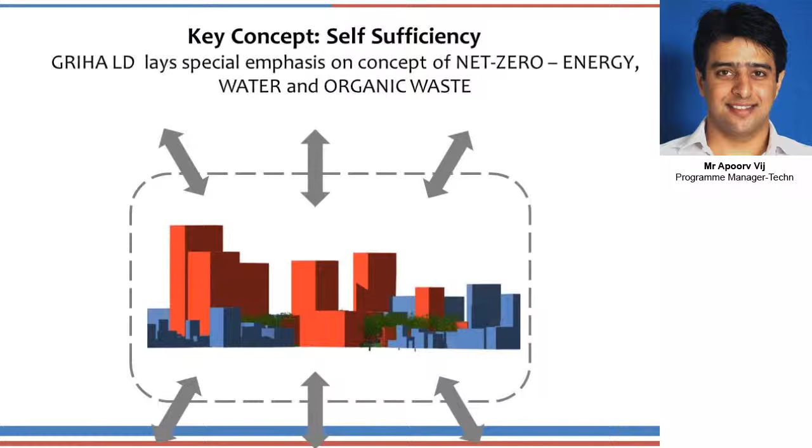Focusing on broader aspects instead of establishing multiple criteria, the entire rating has been split into 7 sections. Each section has some appraisals, but broadly it's the sections which dictate the overall points. So again, the focus is on key numbers at the development level, not minute detail of everything, because at that scale, broad numbers work.

The 7 sections of GRIHA LD are carrying capacity, site planning, water, solid waste management, transport—important at the LD level—social, and energy. Social is something GRIHA is slowly focusing on, adding social parameters to each rating system so we constantly shift from being purely a green building rating to a sustainable building rating system. In addition to environmental parameters, a conscious decision is to keep adding socioeconomic parameters and keep pushing ourselves towards a sustainability-based rating system.

In each of these sections, impact is calculated on 2 key themes: self-sufficiency and development quality. Self-sufficiency focuses on resources, so only 3 sections have this component: energy, water, and solid waste. Everything else has development quality as the only parameter. The subsections are: energy self-sufficiency, water self-sufficiency, organic solid waste treatment, site planning, energy, water, solid waste management, transport, and social.

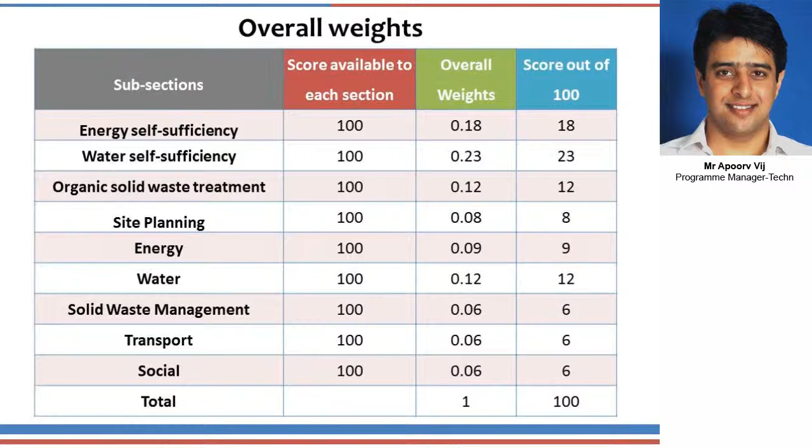The rating of the project is done in 2 parts. One is the master plan rating—once the project is conceived right in the beginning, a one-time rating to see the proposed self-sufficiency of the entire development once complete. But each phase gets its own rating based on actual construction. So the master plan rating can be taken right at the start, but if the project is split over 3 phases and the 3rd phase starts 10 years from now, requirements, priorities, bylaws, and population density will change. Therefore each subsequent phase's rating is independent and evaluated at that point in time based on the parameters relevant then.

So let's begin with the sections. The first section is carrying capacity and carbon footprint. This is purely an indicative section, meaning there are no points here, but we wanted to introduce it because we want projects to start doing this analysis for themselves, to begin understanding what kind of pressures are being exerted by the development.

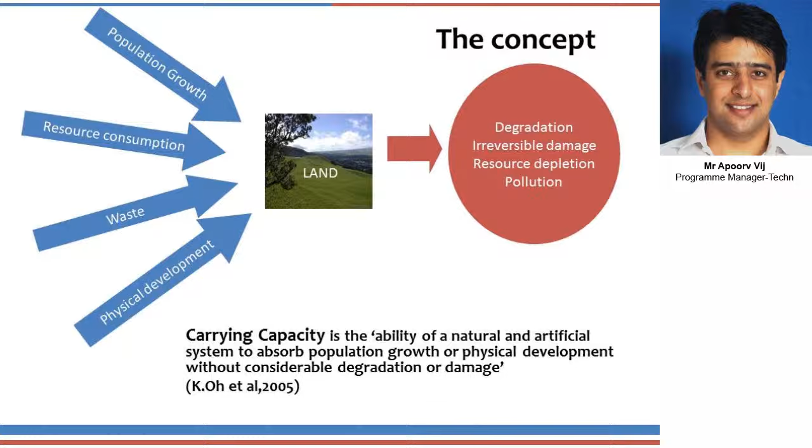To do this in a simpler manner, since we've just begun introducing this in the ratings, we have focused on three parameters for carrying capacity right now. The first is carrying capacity of available water. Here, as you can see on the screen, for the project level, what we ask you to do is look at the total water available to you, divided by the per capita requirement per day.

This gives you the total population that can be supported on the site by the amount of water actually available. If the population that can be supported is greater than the population you're planning, that means the people on site, once the project is complete, will always have enough water and there won't be a shortage, unless the supplies stop. Suppose on a piece of land only 15,000 people can be supported, and you are planning a project to house 18,000 -- that means there's a shortfall for 3,000 people's daily water requirement. The intent here is to provide those indications to the project team.

This section does not affect the rating, but the intent is to keep indicating the kind of development that is being done. The next component is carrying capacity of green cover.

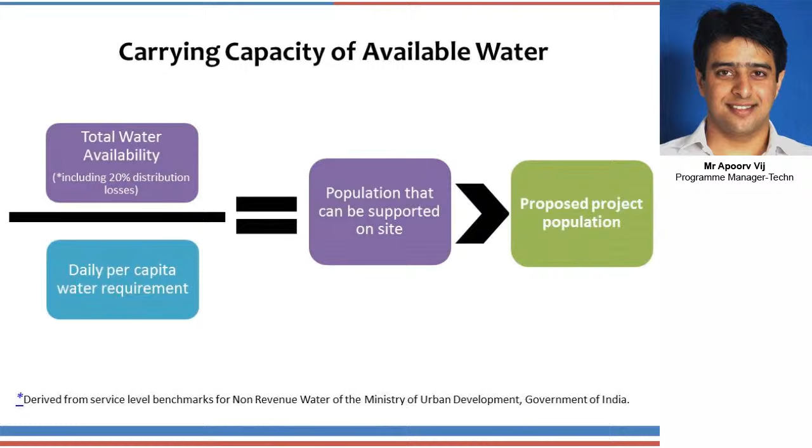This is based on a WHO standard. WHO says in any large-scale development or city, every person must have at least 9 square meters of green cover available to them -- that's the minimum amount of green cover required. So here, one looks at the total green cover divided by the project's fixed population only. If that is greater than 9 square meters, then you are doing a good design, meaning every person will have a certain amount of green cover over and above the WHO recommended minimum standard.

The green cover here only counts canopies of trees and urban forests. Playgrounds, jogging tracks, paved parking, and grasses are not counted here -- only tree cover and urban forests.

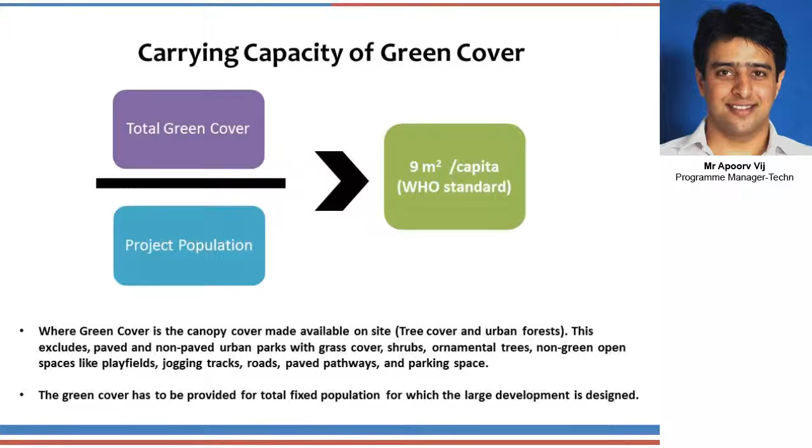The last part of carrying capacity is carbon footprint calculation. Here we ask you to calculate the per capita carbon emissions -- again indicative, but an exercise we want people to begin doing for their projects. It's fairly straightforward: we take the total CO2 emissions from the buildings, then the total CO2 emissions from transport, and the summation gives us the total CO2 emissions.

How do we get CO2 emissions from the buildings? You look at the total energy consumed by the buildings and site infrastructure -- there's a section that covers all energy from where you can get this number. You multiply it by 0.81, which is the emission factor we're considering, based on the Central Electricity Authority report. That gives you the net annual emissions from the buildings.

After this, we look at CO2 emissions from transport. There's a dedicated transport calculator built into the online documentation tool of GRIHA LD. You simply input the minimum distances people have to travel within the site, and depending on that typology, it calculates annual CO2 emissions from transport. Both these numbers are extracted from the tool, giving the total CO2 emissions from the development. When we divide this by the total project population, we get the annual per capita CO2 emissions. India's national average is 1.3 tons CO2 per annum per capita.

So if the emissions are below this, that means the project is actually designing for a lower footprint than India's national average.

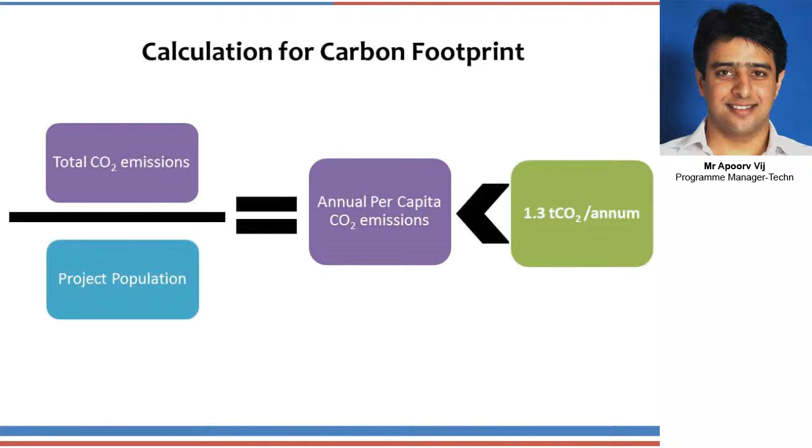So in case a project constructs very pedestrian-friendly, walkable distance-oriented developments, and if they construct efficient buildings with a lot of clean energy sources, then that, of course, gets benefited.

Moving on to the 6 sections, beginning with site planning and coming to development quality. So the stormwater management is the first criteria, which is partly mandatory.

This has about 30 points. In this section, we're looking at 3 different things. First, ensure that the total stormwater management plan is designed such that post the development of the project, the peak runoff rate and quantity do not exceed the runoff rate and quantity from the last 2-year 24-hour design. This is mandatory. The idea is to ensure that because of the development, urban flooding should not start happening.

The peak runoff rate and quantity before construction should be met even after construction. Now this, for a 2-year 24-hour design, is mandatory. However, if the projects do this for a 5-year 24-hour peak design, that means a broader average, then the projects are given 15 points because that's a better design, a better initiative. So basic design of a 2-year 24-hour design is mandatory, but a 5-year 24-hour design gets points.

In addition, incorporation of sustainable urban drainage systems, or SUDS, into the stormwater management strategies, to ensure that litter, solids, hydrocarbons, etc. are removed from stormwater, fetches extra points. Essentially, the projects will have to design SUDS for the entire stormwater drainage so that the SUDS can take care of and filter the particles out of the stormwater.

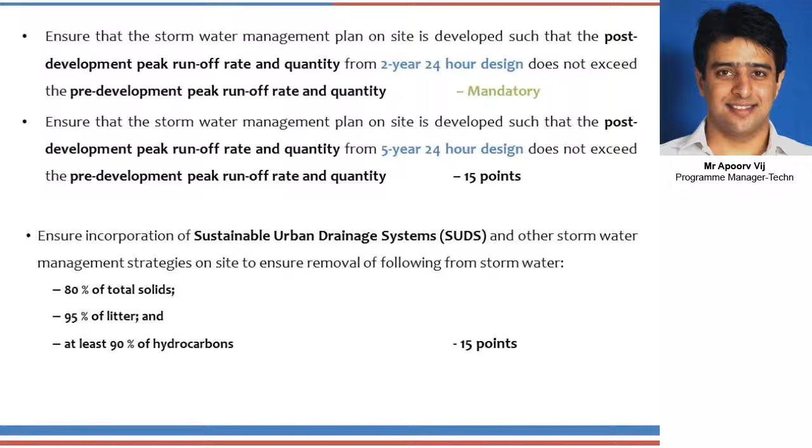The intent of SUDS is that they are a sequence of management practices, control structures, and strategies designed to efficiently and sustainably drain surface water while minimizing pollution and managing the impact on water quality of local water bodies. So these are natural mechanisms to manage stormwater.

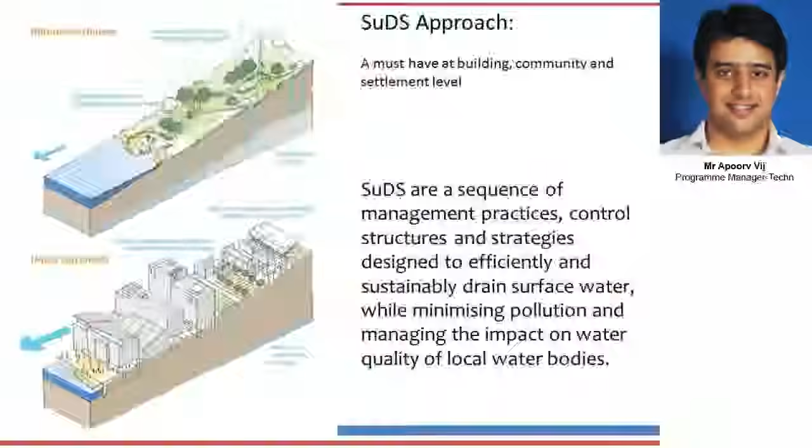The next parameter is maintaining existing site features. Projects are awarded about 30 points for this. The intent here is to ensure that more than 25, 50, or 75% of the total site area under existing natural features on site, like water bodies, dense mixed species tree clusters, and very steep slopes with contours greater than 1:4, are preserved during construction and post-construction.

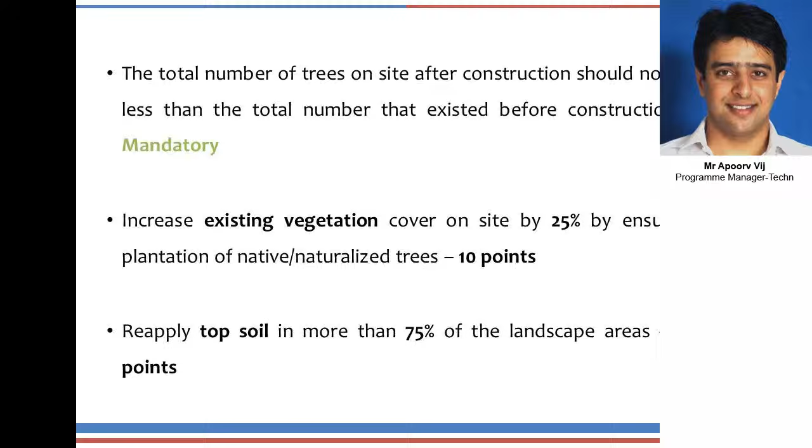Coming to the next section, that's energy, and let's begin with self-sufficiency. Design the development to ensure at least 25% self-sufficiency. This is mandatory. That means a certain amount of self-sufficiency has to be built in. This can be done through energy efficiency and on-site renewable energy sources.

Again, as I said, GRIHA LD is focusing on flexibility, so we do not mandate how much can be achieved through energy efficiency and how much through renewable energy sources. We just say achieve the 25% self-sufficiency, and the project teams can choose what is the balance between energy efficiency and on-site renewable that they would like to implement. Of course, the eventual aim is to see if the project can be designed to be fully self-sufficient, in which case that will be net zero.

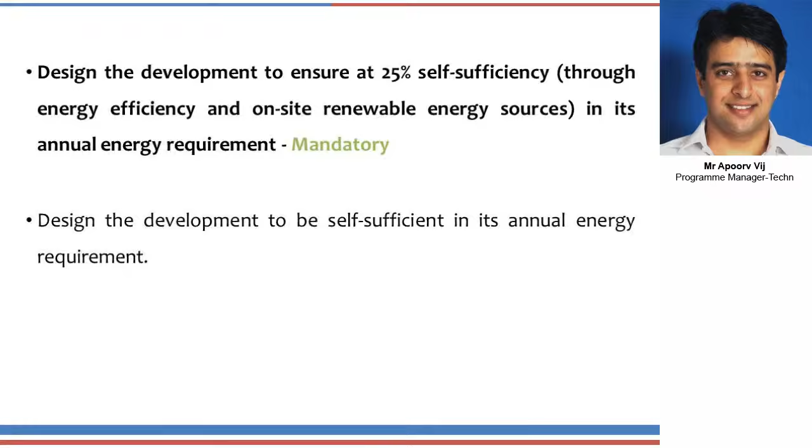Now, the methodology to do this has two parts. One, demand reduction. First, design energy efficient buildings, energy efficient street lights, etc., so that you need to consume less energy as compared to the GRIHA base case. So the GRIHA base case EPI and the GRIHA base case for street lighting, which are there in the LD manual, are used here as base cases, and you have to design the buildings to ensure that your buildings are far more efficient than these, and that will start bringing in the self-sufficiency for you.

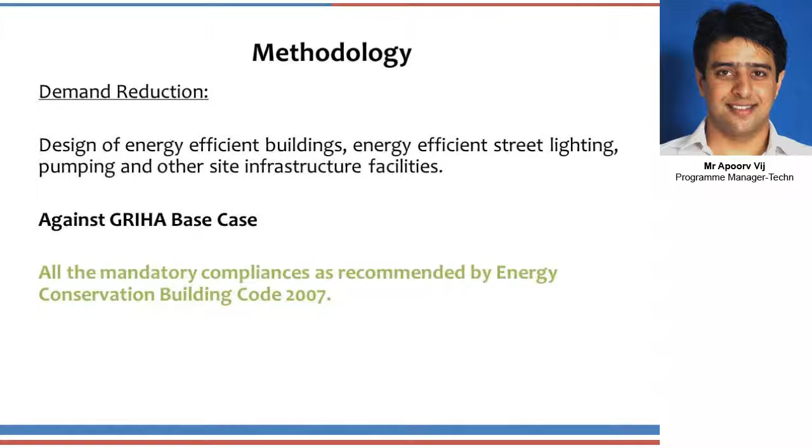Looking at the calculation, this is how actually the entire calculation is done for self-sufficiency. On the top, you have the design case. B1 is building EPI. EQ is equipment load. As you know, in GRIHA, the EPI does not include equipment load, but in LD, we take into consideration every unit that gets consumed on site. So we say building energy consumption, L1, L2 are street light energy consumption, and P are pumping and utility energy consumption. RE is the on-site renewable that gets generated.

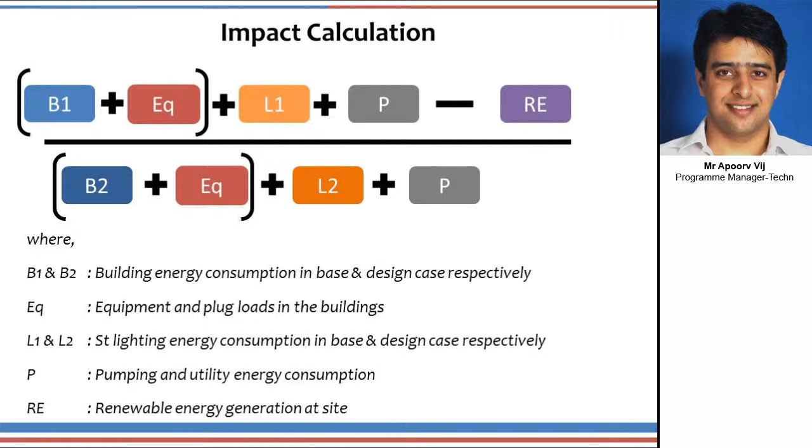So if you notice, B1 and B2 are different. B2 is the base case EPI. If your buildings are far more efficient than GRIHA, then B1 will be quite less. That begins your reduction. L2 is base case street lighting consumption. If your street lights are more efficient than the GRIHA LD base case, as you can see in L1, it will be different, and therefore reduction will happen. And the remaining will happen through RE. Their equipment load and pumping and utilities do not have a base case in GRIHA LD, and therefore whatever you select in base case will go into design case. They will stay same in both of them.

Coming to development quality, moving to outdoor street and security lighting. This is a mandatory clause. Outdoor street lights should meet the required lux levels. This is crucial from the perspective of visual comfort of occupants of the project in the night when they move about. This is also useful and important from security perspective, that all the outdoor areas, wherever required, have sufficient amount of light and are not dark. Also, additionally, automatic switching or dimming controls should be provided for all outdoor lights.

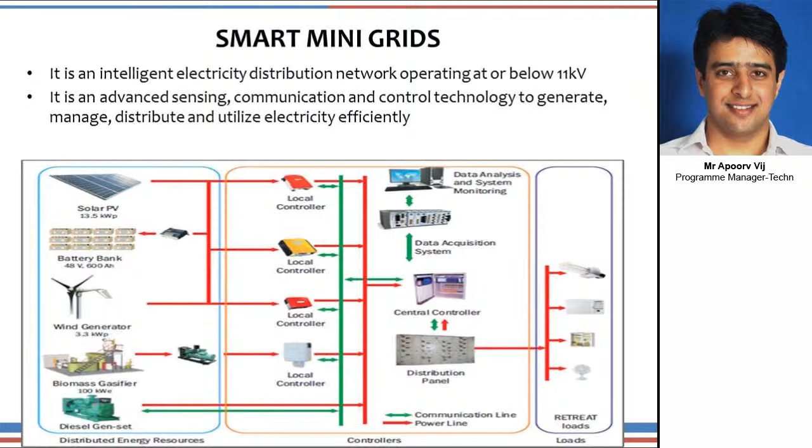The wastages are less. So for example, if a project has renewables on site and it has a direct connection from the utility grid, then the controller can see how much energy is being obtained from the renewables. It will use that completely, then see how much more energy is required by the project and take that from the utility grid. So it can do real-time monitoring and this management automatically, which is an extremely important move now. So therefore, we have certain amount of points dedicated to smart mini grids. First, integration of various energy sources with prioritization to renewable energy sources should be done, which means the smart mini grid must on site first consume renewable energy and the balance should come from the utility grid.

Real-time monitoring and control, even on mobile devices. So wherever you are, you can go online through your tablet, laptop, mobile phone, and look at what the consumption numbers are like, what generation is like. And a bit of demand side management is important. So in case the controller thinks there's a slight fluctuation, it should be able to turn off water pumping, street lighting, etc., which is why we've written based on predefined criteria. So if there's a fluctuation, do X. In case there's an energy shortage, do Y, etc. Those should be built in.

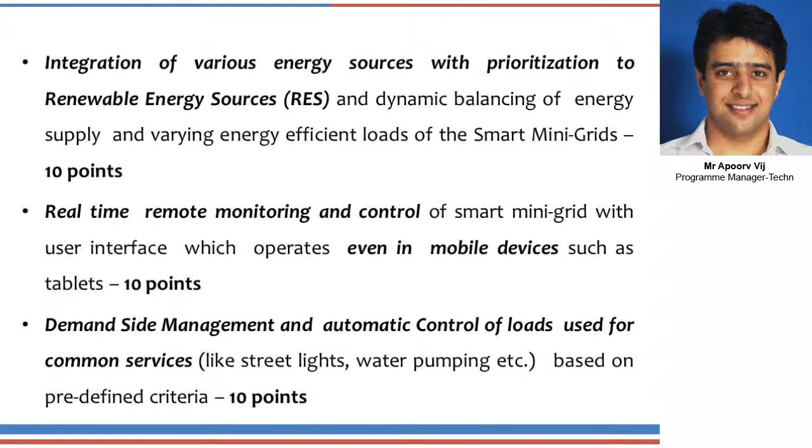Passive urban design. Here one is focusing on adopting strategies so that the outdoor temperatures in pedestrian areas do not increase too much. And if you do a good passive design, then it should be reduced below the GRIHA LD base case. To simplify that again, because of construction, there's a certain amount of increase in outdoor temperature that happens. The intent here is to see how much that outdoor temperature increase can be reduced below the base case, and points are awarded accordingly. This is again a point-based analysis, and therefore we ask you to do this analysis over 5 outdoor common areas. Common areas would mean areas where people gather mostly, because we're looking at occupant comfort.

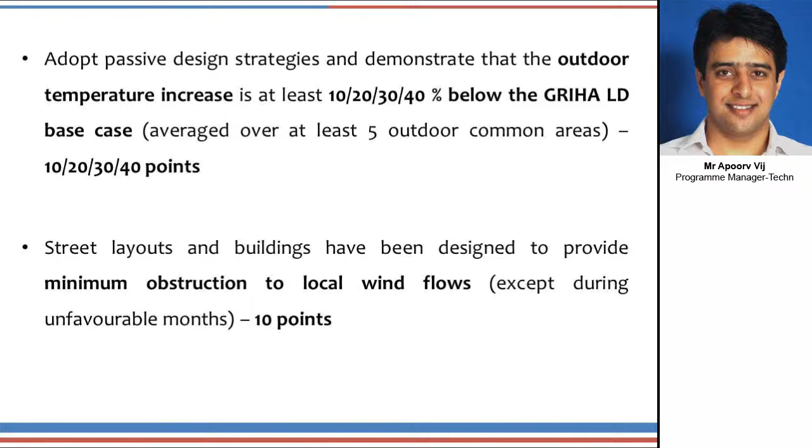And street layouts and buildings should be designed to provide minimum obstruction to local wind flows, except during unfavorable months. So in case you're in Delhi or, say, Chennai, and you don't want a lot of wind flowing through peak summer months, but otherwise you would like the wind to keep flowing, minimum obstruction on that.

Coming to outdoor temperature, an example is this site where you have a lot of soft paving, you have trees, you have water bodies, all of which help mitigate the outdoor temperature. And the calculator that we have is designed to do this analysis. This calculator analyzes the effects of built environment over an area of 50-meter radius. And therefore, one suggests the project team to select at least 5 representative areas and do the analysis over there.

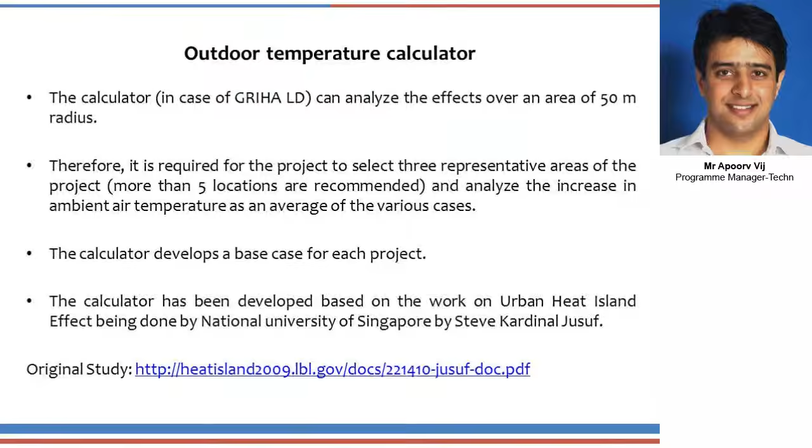The calculator develops its own base case to analyze how good you are. This calculator is based on the work being done by National University of Singapore on urban heat island effect. And the output of the calculator is something like this. So if you notice the blue column, it will tell you, based on your design, this would have been the increase in temperature in the base case. The green column tells you this is the increase for what you are proposing. And the purple column tells you this is the reduction between the two. So higher the reduction, that means better your design against the base case and better the points you get.

So the more you design for outdoor temperature comfort, to be comfortable for occupants outside, the better the points that you get. This can be done largely through a lot of vegetation, because green cover does have a huge impact on outdoor temperature mitigation, and the massing and the percentage of hard paving that you have outside. Based on the sensitivities that we did, these are the key things that affect it a lot.

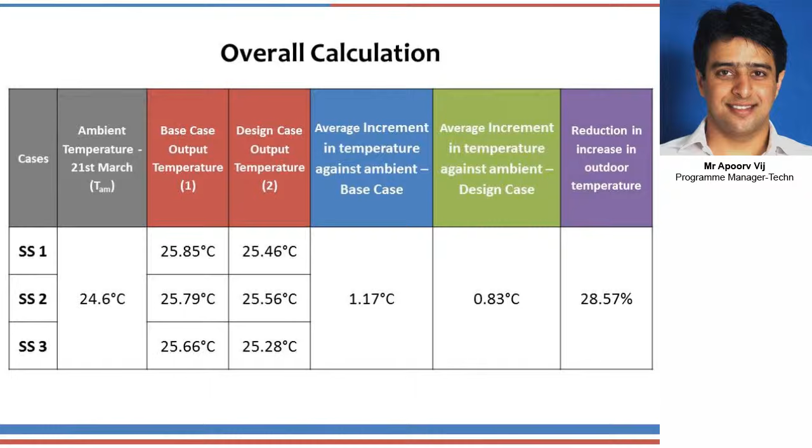Last component of energy is metering, operation, and maintenance. This is partly mandatory. So energy metering is mandatory. So basic meters at multiple sources to see how much energy is being consumed from the local grid, DG set, on-site renewable energy sources, that's mandatory. Sub-meters on each building, outdoor lighting system, and the campus pumping station, again, mandatory. There should be a constant log to see this is the amount of energy being consumed through each of these point sources.

After that, if a project has a dedicated operational staff for O&M of all electromechanical systems, you get 10 points. If an operation and maintenance protocol is actually established and implemented, that's 10 points. It's extremely crucial to educate the operational staff with the protocol. And periodic energy auditing fetches another 10 points. That means every year, at least a basic audit, very, very basic, and tabulation of numbers should be done by the project teams.

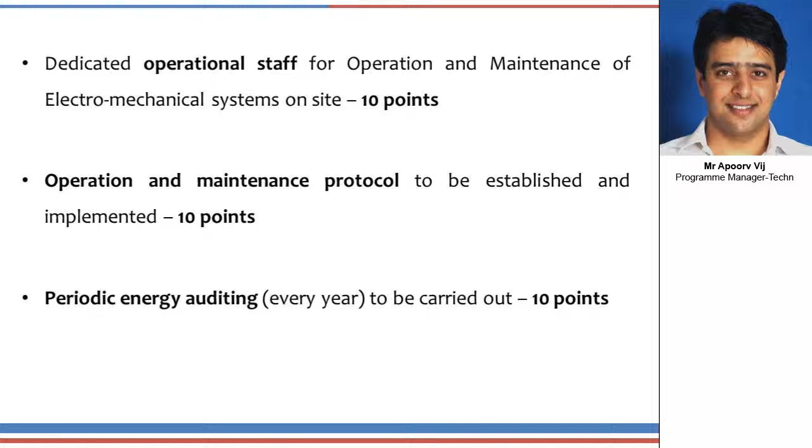Then we come to water and wastewater, self-sufficiency, and there we say design the development to be at least 25% self-sufficient in the total amount of water required. This means self-sufficient against groundwater or municipal supply. See how you can capture water on your site, recycle and reuse it so that you are self-sufficient on site itself. 25% self-sufficiency is mandatory, but it is recommended to be fully self-sufficient as well. And interestingly, in GRIHA for large developments, out of the 10 projects that we have, about 3 projects right now are actually designed for 100% self-sufficiency of water, which is a very encouraging practice.

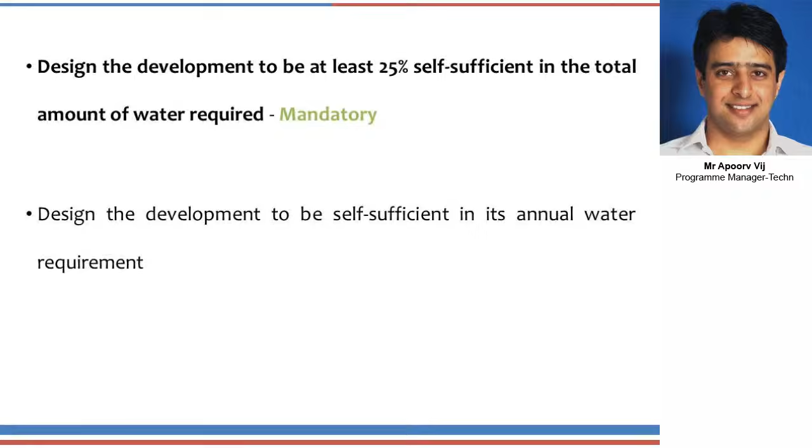So the self-sufficiency calculation looks like this. You have total water demand, which is the building water demand, domestic water demand, your landscape water demand, and all the water you need for utilities. This is the total demand that you have on site. You subtract what you are recycling and reusing, so recycled wastewater, and the captured rainwater that you are filtering and reusing. Whatever is balanced is the amount of water that you need from the municipal grid or groundwater.

If this balance is 0, that means you're fully self-sufficient. If you are not reusing water at all, you're not capturing rainwater, and that water reuse section is 0, that means you're fully dependent upon outside. So here the mandate is to have at least 25% self-sufficiency, but 100% is recommended.

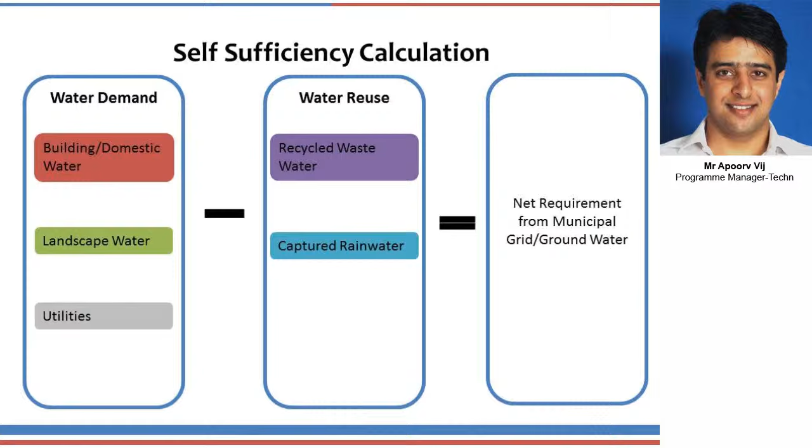In development quality, the first becomes quality of water. This is mandatory, which means whatever water is being used at whatever source or whatever point in the project should meet the minimum quality requirements as per the IS codes.

Water metering, so metering of main water supply, treated water, recycled water, rainwater should be metered. That's mandatory. Sub-metering of each building and sub-metering of the irrigation system is mandatory. The idea is that metering is a very crucial aspect, and it is important to conduct this in projects. That's why we made basic metering mandatory, and advanced meterings get points.

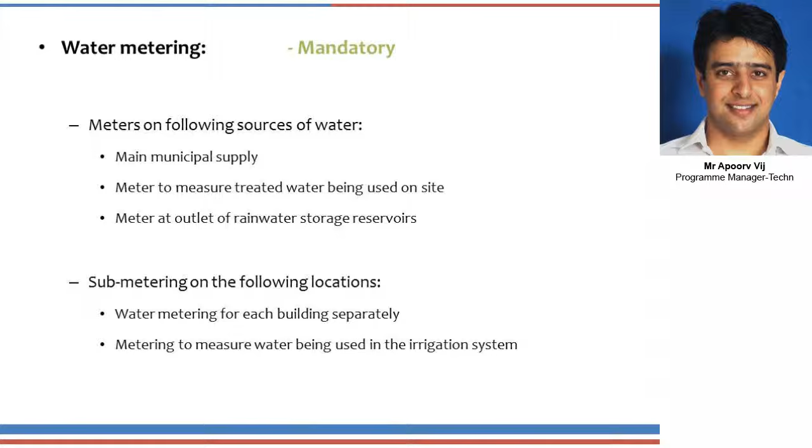An STP or wastewater treatment on site should meet the CPCB norms. So the project gets 20 points if the STP meets the CPCB norms. If the project recharges surplus rainwater through appropriate filtration measures, it gets another 20 points. That means you have surplus rainwater and you're recharging that after filtration. That's a good practice. However, if the Central Groundwater Board says do not recharge for your particular location, then this particular parameter is not applicable to you.

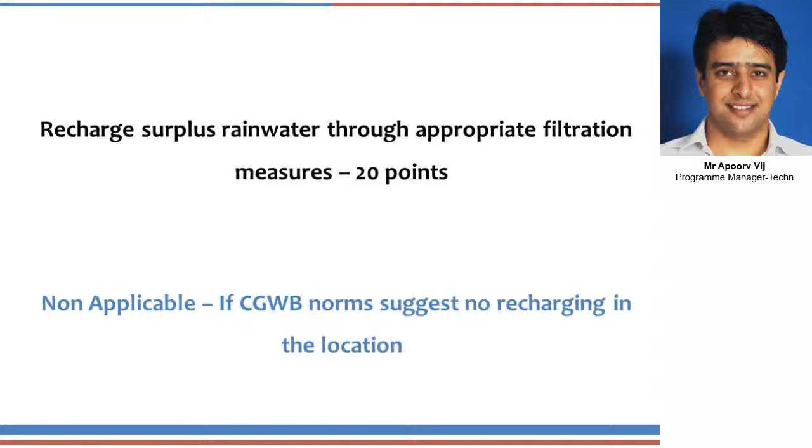All fixtures on site should be low flow fixtures. So as a blanket component, everything should be low flow. WC, urinals, showers, kitchen faucets. So it can straight away be looked at in a tender document, in a BOQ, that everything purchased is low flow.

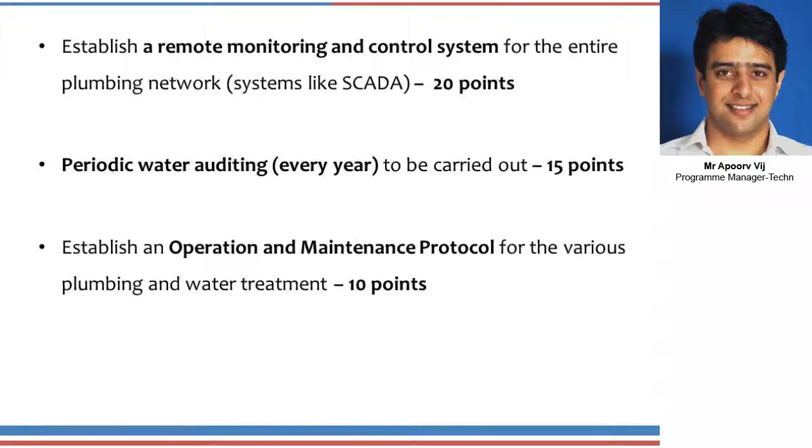And the last one, remote monitoring, operation, and maintenance. So establish a remote monitoring and control system for the plumbing network. That's 20 points. Do periodic water auditing as well. That's 15 points. And establish an O&M protocol. That's another 10 points.

Coming to development quality, the first part that's mandatory is handling and treatment of special waste. By special waste, we refer to medical waste. So if there is a medical facility in the project, then on-site incinerators, autoclaves, etc. for treatment of that waste as per the bylaws, as per the guidelines must be there. Or if the guidelines say send it to a nearby treatment facility, then that provision should be there. That plan should be in place.

And the second special waste is e-waste. So projects are required to have contractual tie-ups that eventually e-waste from site will be taken and recycled by certified e-waste recyclers. Both of these are crucial, important special waste, and their treatment is an extremely important aspect.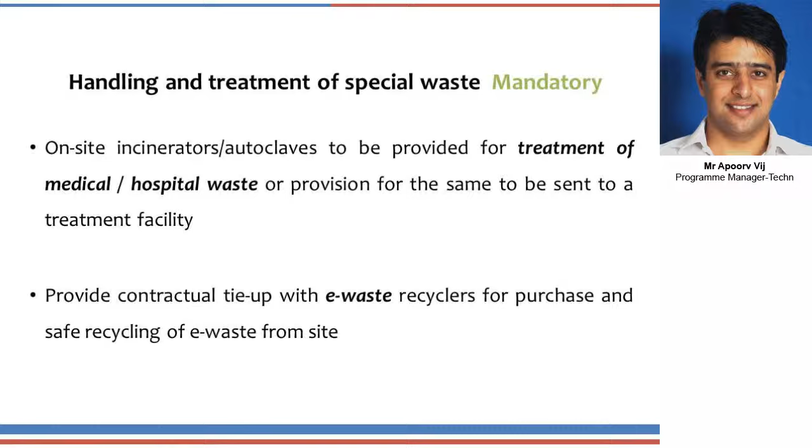Use of sustainable construction materials. This is something new that has been introduced in version 4. In your construction of roads, ensure that at least 5 or 10% of recycled waste is used. Most of the road construction, you can use recycled plastic, etc., or sometimes waste concrete from the site itself, so that's recommended.

Reuse waste in construction of paving on site. So this could be broken bricks, blocks, etc. from the project itself, which can simply be reused on the pavements as well. And all cement in the project should be PPC, or if you're doing an on-site mix, then at least a 15% mix.

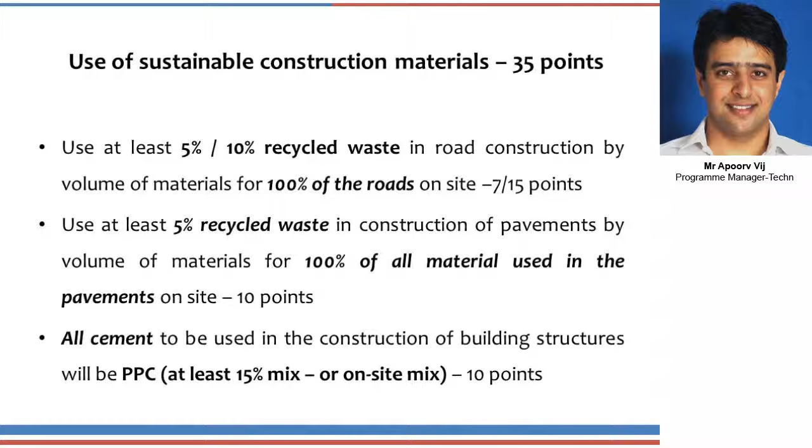Segregation of storage of waste on site. This is during operation. Provide hygienic secondary storage facility for organic and recyclable inorganic waste. That means people segregate waste when they throw it in different colored dustbins. At the project level, you should have a dedicated space where different wastes are stored separately.

And once the wastes are stored separately, there should be contractual tie-ups with different recyclers who can purchase this waste from you and recycle it. Organic waste, of course, you would treat on site, but plastic, metal, paper, etc. can be sent to outside recyclers who can purchase it from you. But that kind of a tie-up should exist.

Construction and demolition waste management. Develop and implement a construction waste management plan. So that means during construction, site engineers know how to manage different waste, where to store it on site, how soon to clean it from the different building points and bring it to a consolidated space on the site, and adopt strategies to recycle and reuse this on site or off site.

So if you're doing it off site, then a contractual tie-up with a recycler who is coming and taking it for recycling. If you're reusing this on site, then photographs, etc., of how that is being done on site.

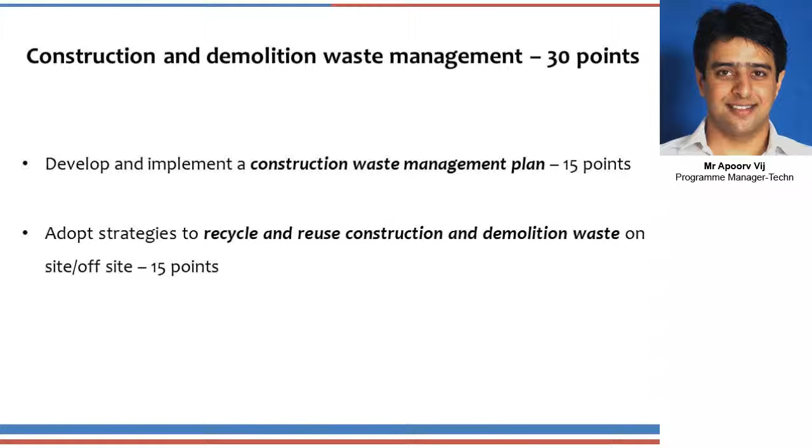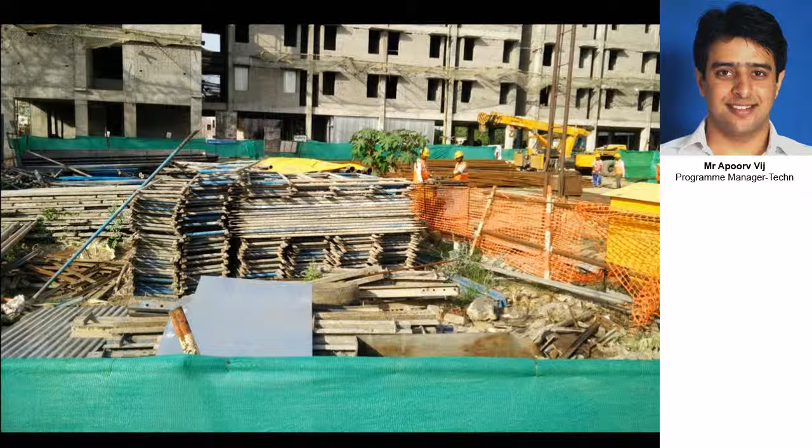This is one example of construction material storage and waste management. Coming to transport, development quality, provision of footpaths and bicycling tracks, and safe interaction of non-motorized traffic with motorized traffic. This is partly mandatory. So firstly, all roads should have footpaths, sidewalks, and cycle tracks, mandatory. All footpaths, cycle tracks should be continuous, wide, and universally accessible.

It shouldn't happen that somebody is using a footpath and walks on a road and it comes to a junction and suddenly realizes that after the junction there is no footpath. That means it should be continuous, it should be wide, and it should be universally accessible. These are important parameters for the success of these infrastructure facilities. Then, importantly, both of these first ones are mandatory. What are optional are the following.

Supporting infrastructure and facilities like bicycle parking, landscaping, public convenience, etc. should be provided. That's 15 points. Having trees, places to sit, etc. are helpful in enabling people to use these kind of infrastructure facilities to walk, to cycle more. And there should be necessary physical safety measures like railing, etc., non-slippery surfaces, so that in case somebody thinks they are slipping, they should be able to hold on to something. This is not necessary throughout the footpath or cycling track, but at crucial junctions where one thinks that some sort of slippage is possible.

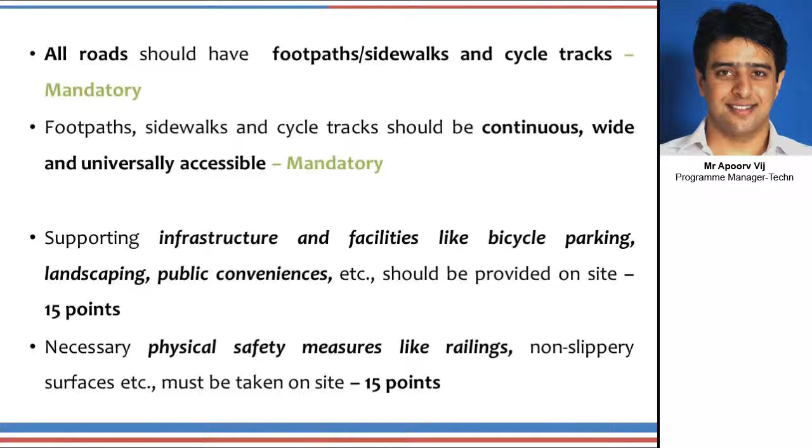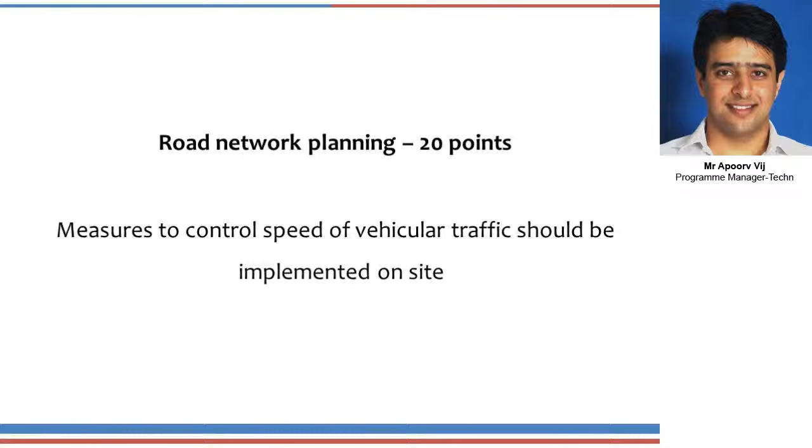Road network planning. Take measures to ensure that the speed of vehicles moving across the site is controlled. This can be done through multiple ways. One is how you design the road network of the site. If there are a lot of straight roads with minimum junctions, etc., then people will speed. However, if there are cul-de-sacs, if there are curved roads, then the speed gets limited slightly. Another way of doing this is by having speed bumps and breakers so that people cannot constantly go above a certain speed limit. They stay within control.

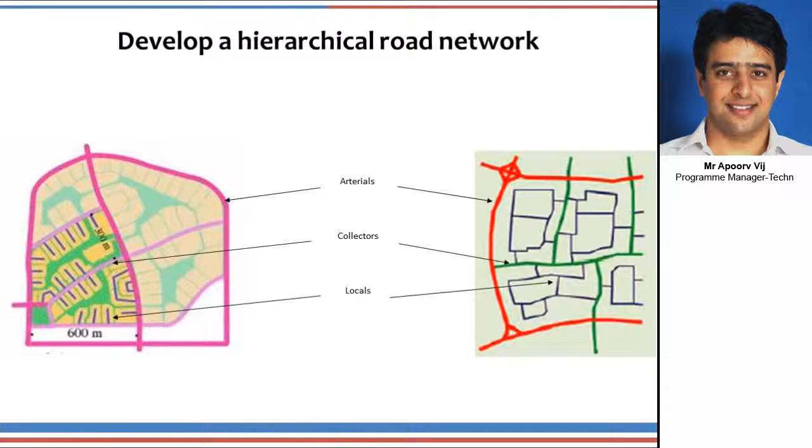On-site parking. So ensure that the total parking provided on the project site does not exceed the area required by the local bylaws, and provide dedicated parking space for physically disabled people as per the GRIHA LD guidelines. Running collective transport services on site. This is another aspect where the GRIHA LD requirement is to run a basic collective transport service like an electric buggy, etc., for people to move within the site. So if people want to go from point A to point B within the site, they can use these kind of collective transport services. The intent is to shift people from their own vehicles, from private vehicles.

And the other part of this is to connect the site to a nearby public transport system, or have the city's public transport system run through the site so people can go to the city areas and back if the development is too far away. So intra-site collective transport system and connection to an outside public transport system.

And the last part in transport is electric charging infrastructure for at least 10% of the parking area. That means if people are buying a lot of two-wheelers and they're buying a lot of electric cars, etc., the infrastructure on site should be such that they shouldn't feel range anxiety. They should be able to go to a point and connect their vehicles there, go do their work, study, etc., come back out without feeling that they won't be able to get back to their home within the development, and they'll have to drag their vehicle there.

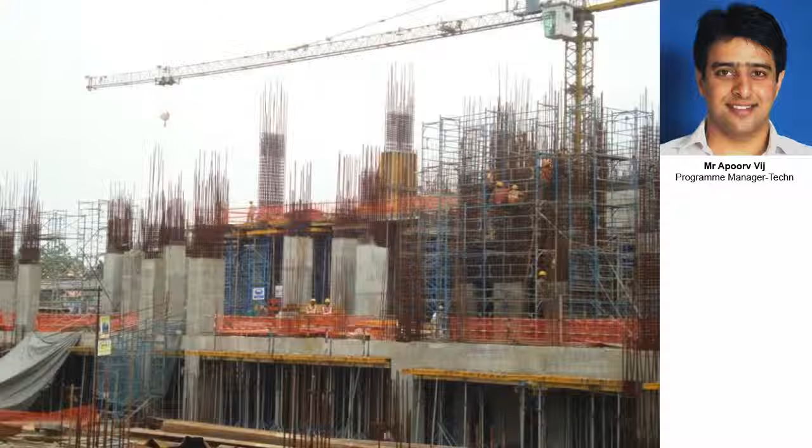Multiple places where we've seen this, of course, in GRIHA, a lot of safety measures in project sites. Earlier, people were skeptical. Now we've started to see that this has become a common practice, so that's a positive thing. Clean drinking water for workers on site, and clean and hygienic, decent accommodation for everybody.

Social infrastructure and development. Here one is talking about design of development that should be done for universal accessibility, including provision of disabled-friendly public toilets. So in case you're designing a neighborhood and there are community centers, ensure that those have the required number of disabled-friendly toilets as required. Slopes, lifts, ramps, railings, etc. should be there as per the requirement.

Second part is create environmental awareness through imparting information through display boards, panels, websites, etc. So you're constantly telling people how they can improve or reduce their environmental footprint, save energy, water.

Next part is to identify tobacco and smoke-free zones on site. So there are areas where smoking should be fully banned, or the entire site if it is fully banned.

And the last one, very importantly, provide dedicated resting areas and toilets for service staff. This is extremely crucial. Most of the time when the developments are done, when projects are constructed, the service staff, the drivers, security staff, maids, etc. are not catered to. Here one is looking at ensuring that they have a dedicated area where they can rest, dedicated number of toilets. Of course, a threshold has been provided by GRIHA LD.

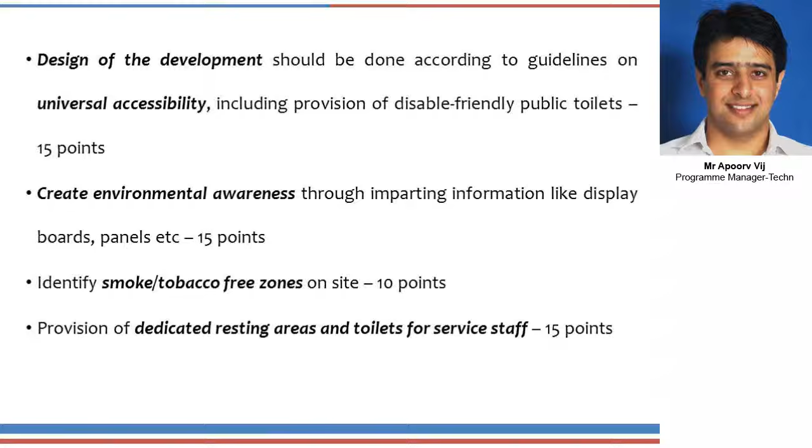Planning for low-income group population. This is when you're doing a neighborhood, a township kind of development. Of course, in an educational campus or an SEZ kind of development, this doesn't work. So therefore, this section is not applicable for educational campuses and SEZs.

So the requirements are: one, EWS housing on site should be provided. The health centers and schools there must be dedicated health centers and schools for lower income group population. And if there's a requirement, or in case there's only one school or one hospital on site, then lower income group population should be allowed to enter it with discounted prices, etc. And we've seen some cases where this is actually being implemented. So this is pretty common now, I guess.

Planning also should consider adequate provision for informal markets. That means there should be dedicated space provided for informal markets. Infrastructure must be there, which can then be used subsequently by people selling their goods over there, vegetables, fruit vendors, etc. But a dedicated space must be allocated for them.